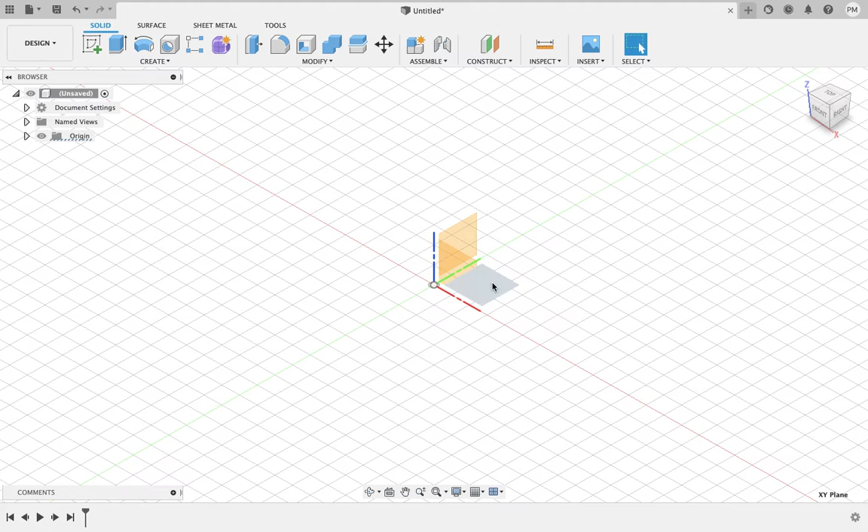So when you open up Fusion 360, make sure you click on the little origin box over here. We're going to sketch on this plane. Now sometimes it should orientate itself into a top view, but it hasn't there.

So what I'll do is click on the top, and we'll just focus on drawing the flower that we did the last day. There are all of these different drawing tools up here. I'm going to create a fit point spline, not even worrying about dimensions right now.

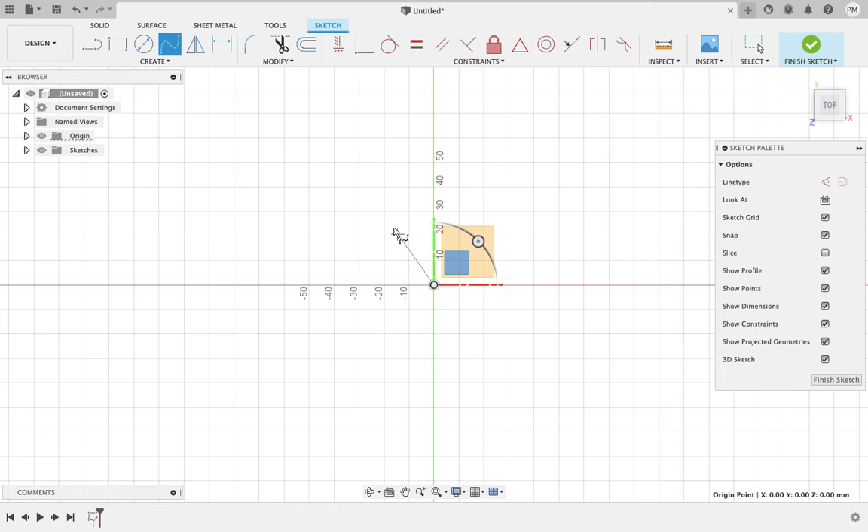So to create a curve, I click once, click twice, and I drag out the shape of a petal. Now what I could do is start manipulating that should I wish.

There are little toggle bars here, and you can move around different points. However, right now the main thing I need to do is flip this over and get symmetry on both sides. I don't know about you, but I like to work smarter, not harder.

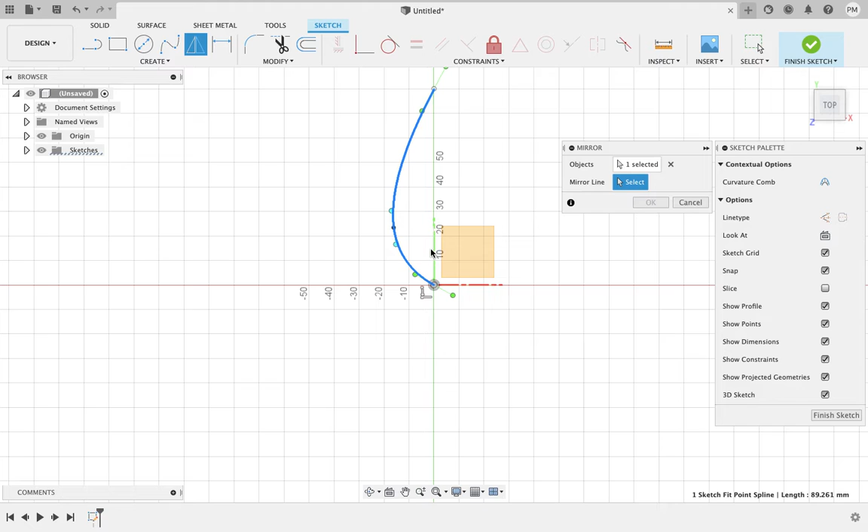In this case, what I want to do is mirror this object over the mirror line, just here. I'm going to flip it over, and now I have a flower petal.

So from here I can create a little pattern for myself. I go down to circular pattern, that's in the create menu. Circular pattern.

I'm going to click on this object, this object. To select two objects you can hold down shift. With Fusion I actually don't think you'll need to hold shift, it's an old habit. Center point is just here.

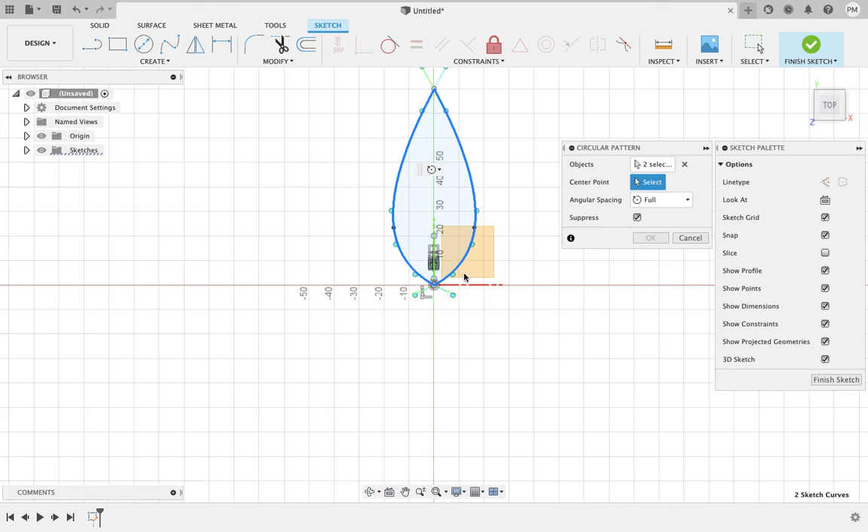And what I'm going to do is do as many flower petals as I like. Okay so that's like the Mitsubishi symbol there. Let's see, go 7. Cool, and now we have a flower.

So if I hit finish sketch and click on the home view, I now have something that I can extrude up into 3D. So let's see what's the easiest way. I'll try and do a selection box. That works pretty good, and if I extrude this, it has selected everything.

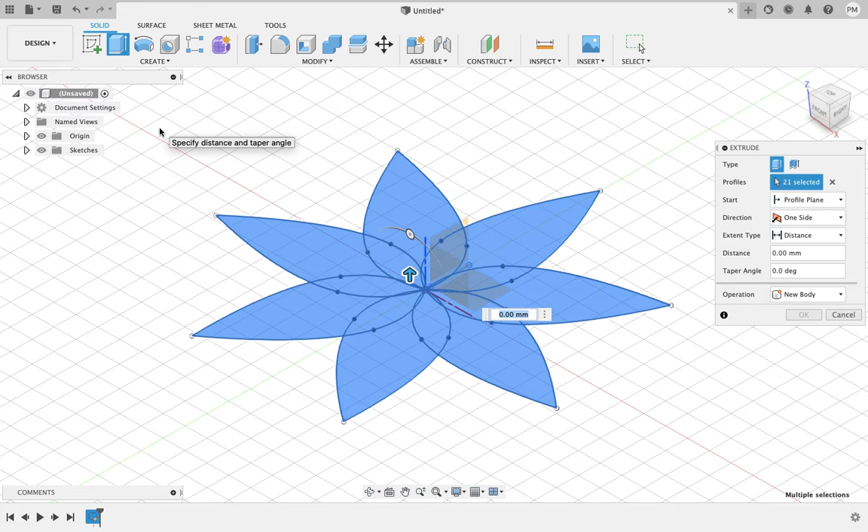So I can extrude this up maybe 5 millimeters. That's fine for now, and we're okay.

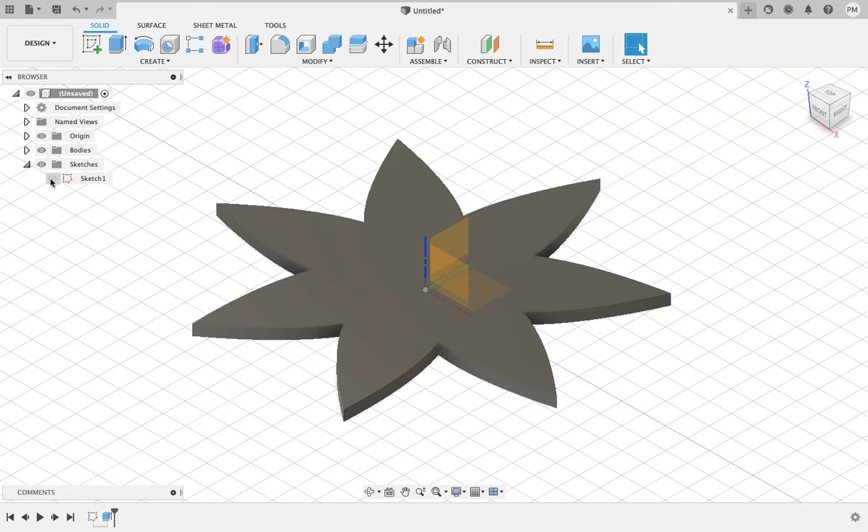Now what I'm actually going to do is go into my sketches and turn the sketch on again. So you can turn things on and off in Fusion just so you can see what's happening. And I'm going to turn off the body for a second.

So I've created a body from a sketch. I'm going to turn off the bodies, and I'm actually going to lift up the inside of the flower here to create 2 levels.

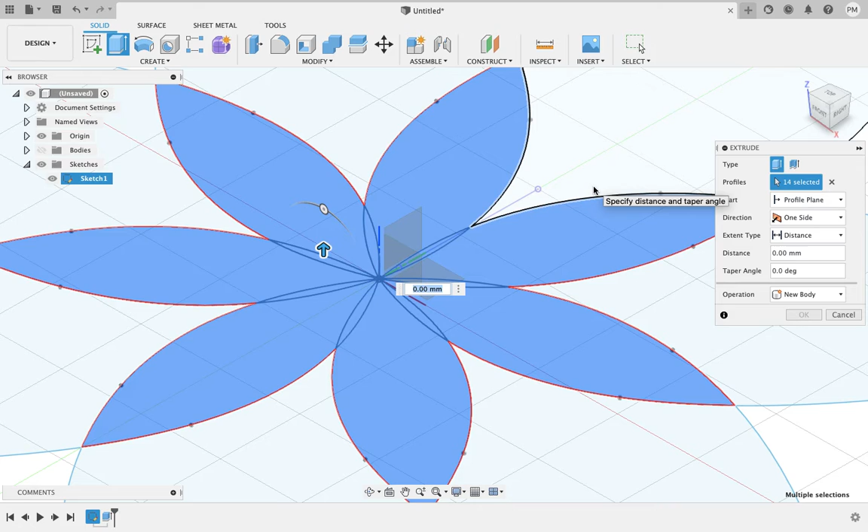Magic, so it's quite smart with the selection. Extrude. And this time I'm going to go up 10. Last time I went up 5 for the outside, this time I'm going to go up 10.

I have to turn on my old object. And Fusion right now thinks I want - see how it's gone red? I'll just zoom out so you can see what's happening. Fusion wants to cut this out, so you can just change this from a cut to a join.

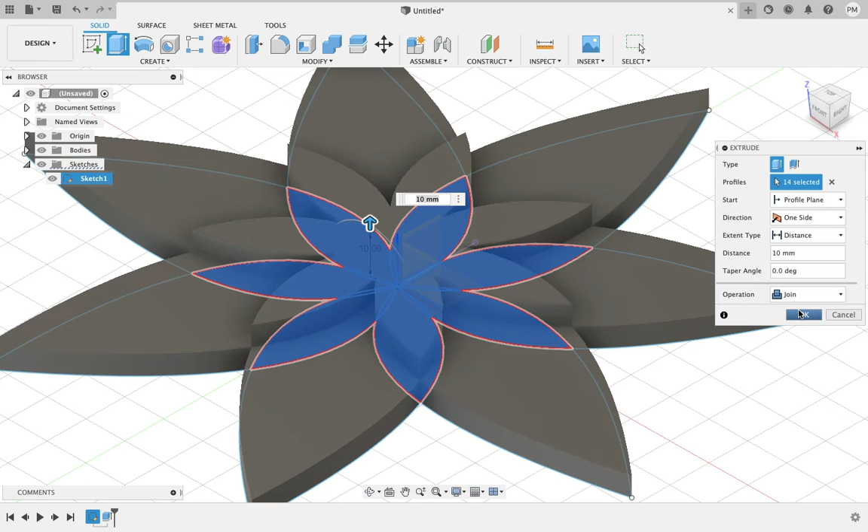And now it's going to create a solid object on the top, for example. See how it's hard to see what's going on with the sketch in the background? I can just toggle it off there, and now we have - let's go back.

Now we have a nice little flower that we can 3D print. To turn this into a key tag, for example...

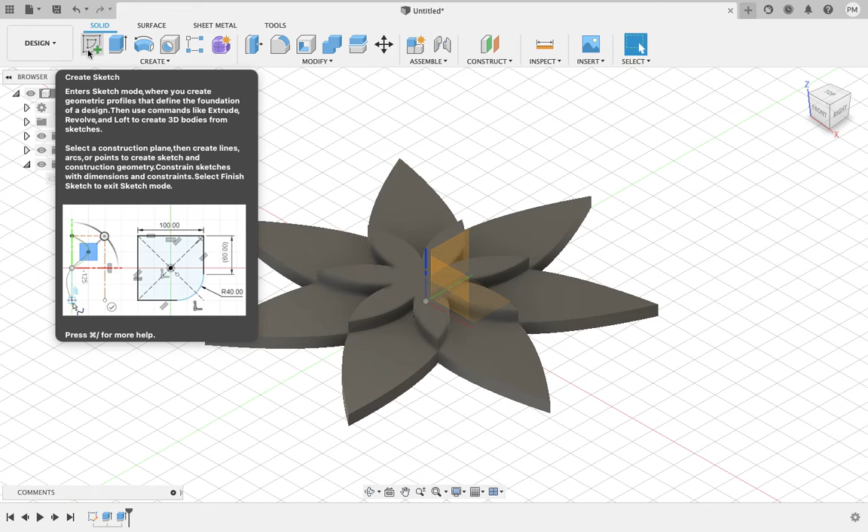What I can do here is create another sketch. Ooh, I can create another sketch, but it's actually more efficient to modify the old one, okay? You can create a new sketch, or you can go into your sketch over here, right click, and edit that sketch, which is perfect - it just goes back onto the same sketch and edits it.

We're just going to create a center diameter circle just on here, and we're just going to create a little hole for the key ring. That's a 6 millimeter hole there.

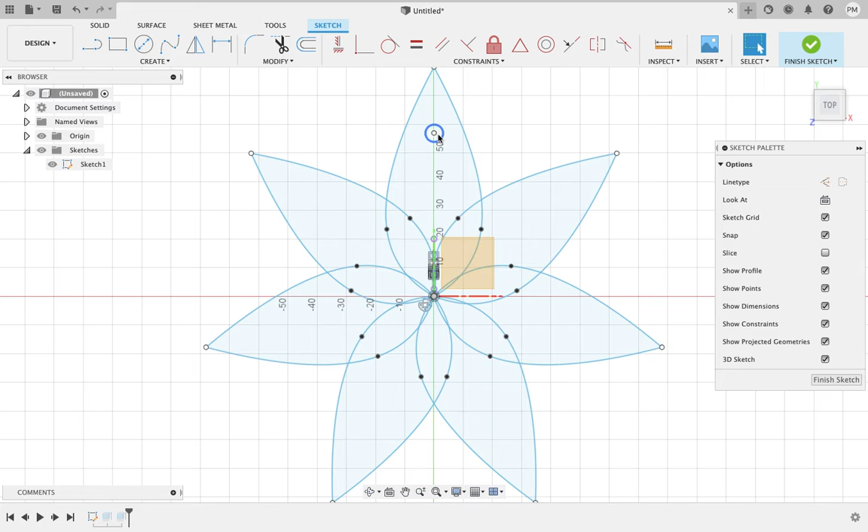So the last thing I need to do, if I zoom in, is extrude up this hole so it'll cut out of the body, and that'll make sense in a moment.

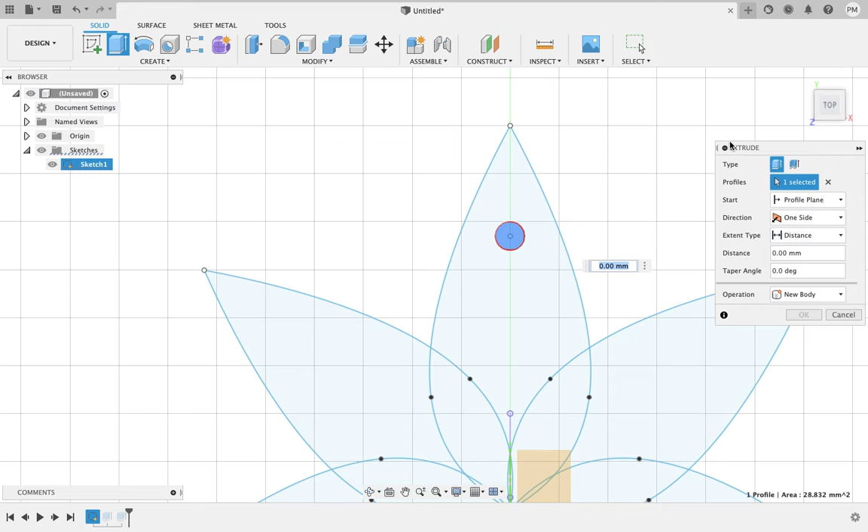A shortcut right now is if I hit E on my keyboard, it'll go out of the sketch environment, and I look at an angle, and what I'm going to do is extrude this up.

Now, I think what's happened here is, in hindsight, creating a new sketch would have been better because we had gone back in our history to the very start. It's created a little cylinder here. That's totally okay, we can work around it. We need to be adaptable.

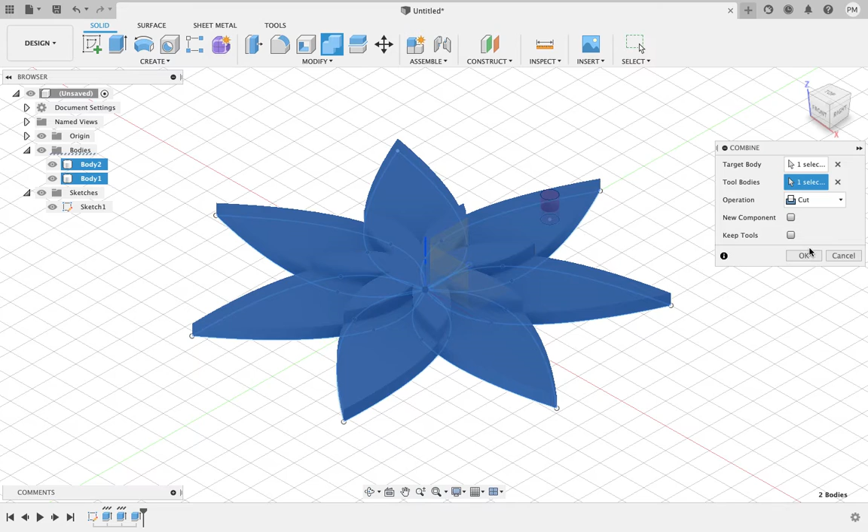So what I'm going to do is go to Modify, Combine, and use that little cylinder to cut a hole out of this object over here. Okay, now I've created my hole.

I'll turn off my sketch so we can see what's happening. If I hit A on the keyboard, that's the appearance dialog box. Once you go into the appearance, I usually just go straight to paint to get some bright colors, and we can think about the color profile of our logo and pulling in some colors here. So I'll go into paint, glossy.

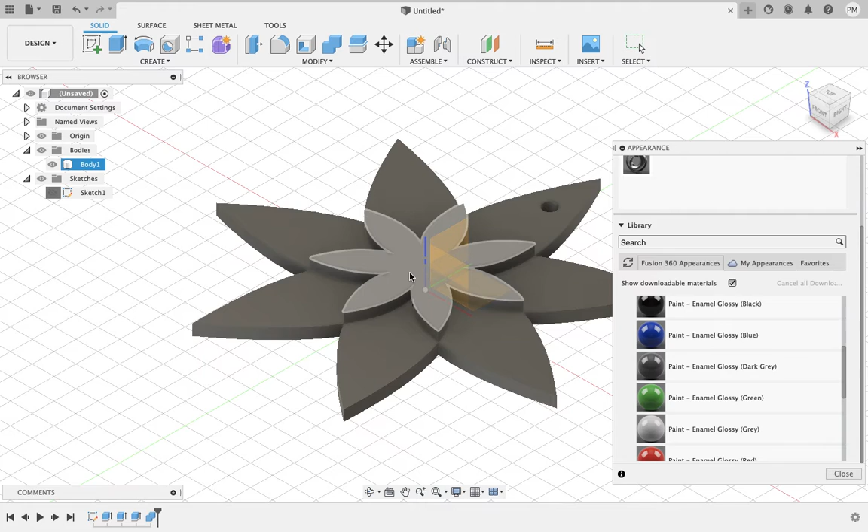What I'll do right now is click on a surface and drag the blue onto that surface there, and let's see. Now I could hold down shift and select all of these all the way around here, but that's a bit boring and I don't want to do that, so I'll hit escape.

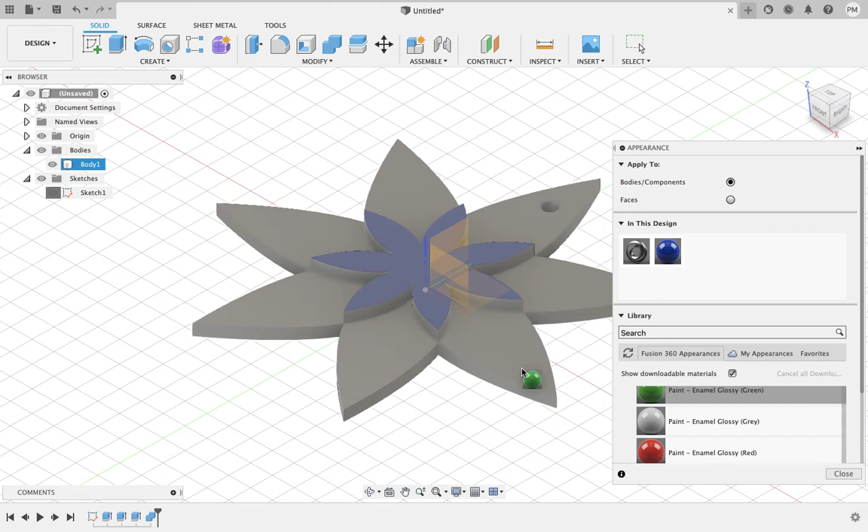What I'll do is with the appearance mode, I'll drag. What is glossy? Glossy is shiny. So what I've done is put green on everything, and then just on this top surface I'll put in a little bit of blue. So now we have something we could use as a key tag.

Now, for example, what we could do here as well, if we wanted to turn this into a candle holder — we're talking about making a candle holder — what I'd suggest is turning it into an interesting candle holder. Year 11s and 12s, do you mind if I focus on this candle holder? I know you're not making the same thing, but all the tools I'm showing you are relevant to your design as well, okay?

So what I'm going to do is show you another version of this, but rather than it being flat like something that's been laser cut, I'm going to turn it into more of an organic flower shape. So it's going to be curvier, okay?

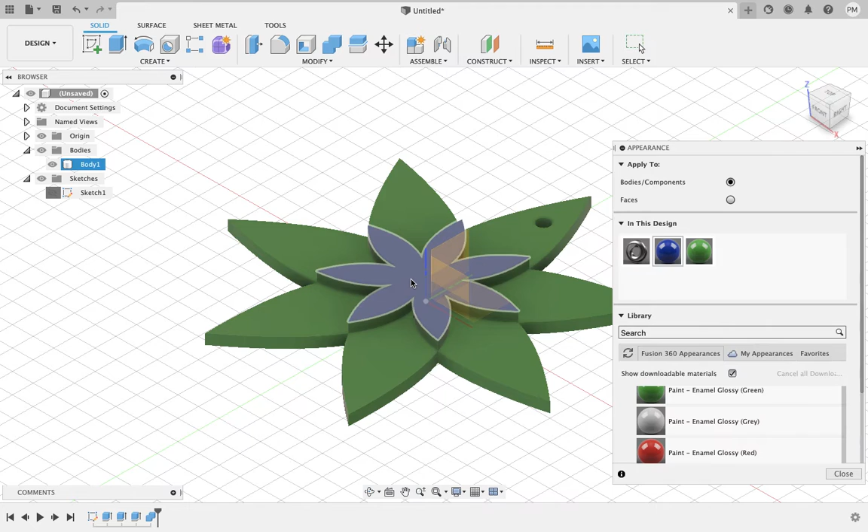Now, so next job. You can just leave it on the table, we'll grab it in a minute.

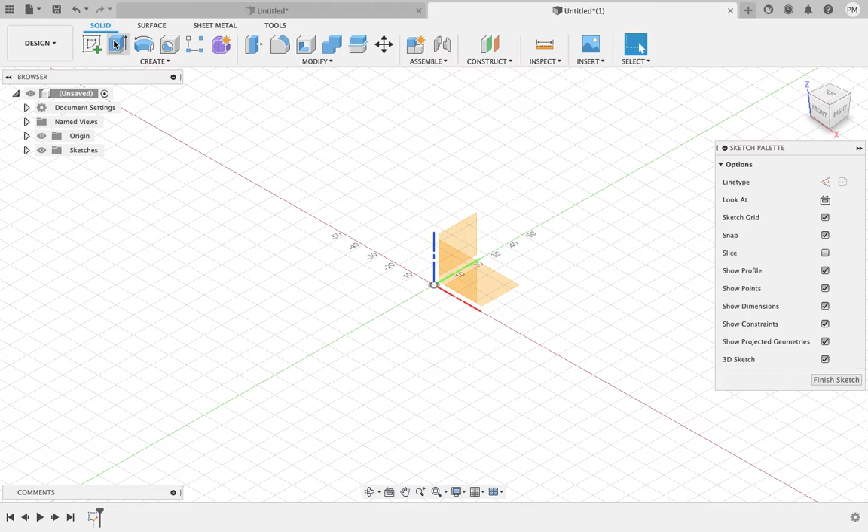Catch you later, Tina. Now, so we're doing a sketch on here in the top view, and let's see. There's a few different ways we can attack this, so I want to start strong.

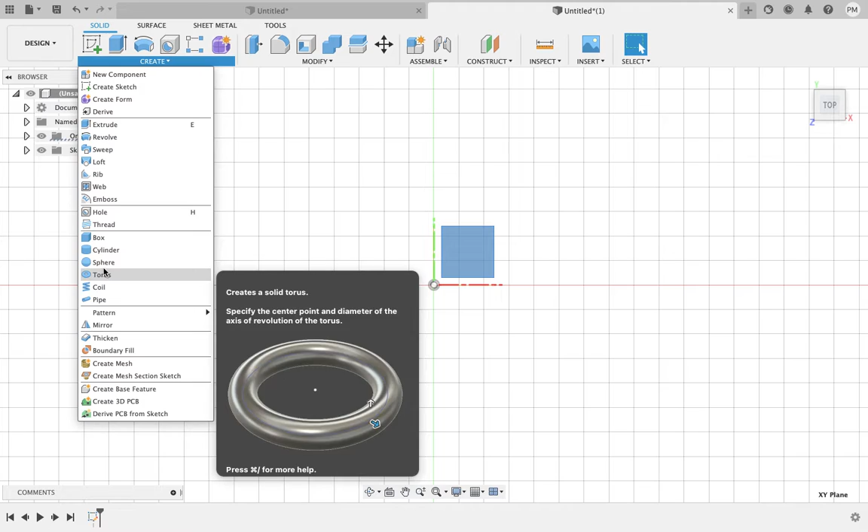Let's see, so I have a design in my head that I would like to create right now. Now this is getting a little bit complicated, but let's see how we go. So I'm going to create a little orb here. I'm in the form modeling section.

Okay, and I'm going to start modifying this orb. Let's see if I've bitten off more than we can chew in 10 minutes. So what I'm trying to do is create a petal shape, and then I can create a circular pattern from this shape.

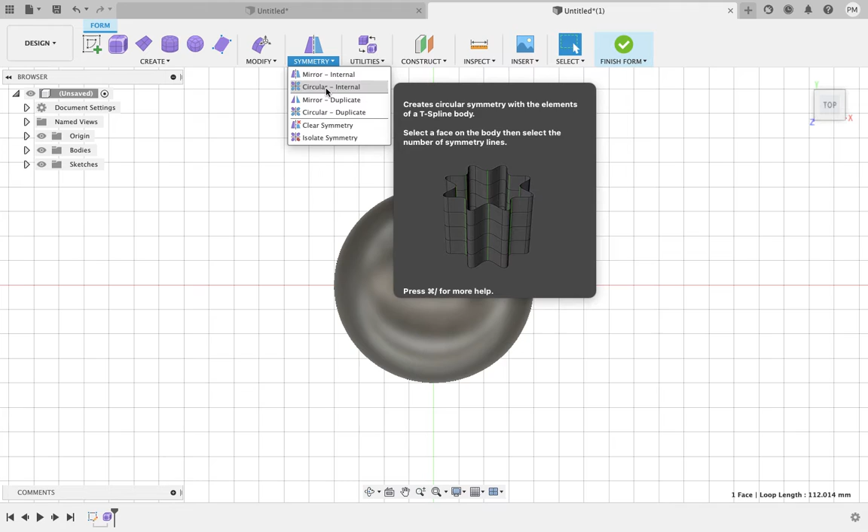What I just did there is create a line of symmetry down the middle here, and what that allows me to do is whatever I manipulate on one side, it will manipulate on the other side. Now I find this pretty cool part of Fusion, so let's see what you think of it.

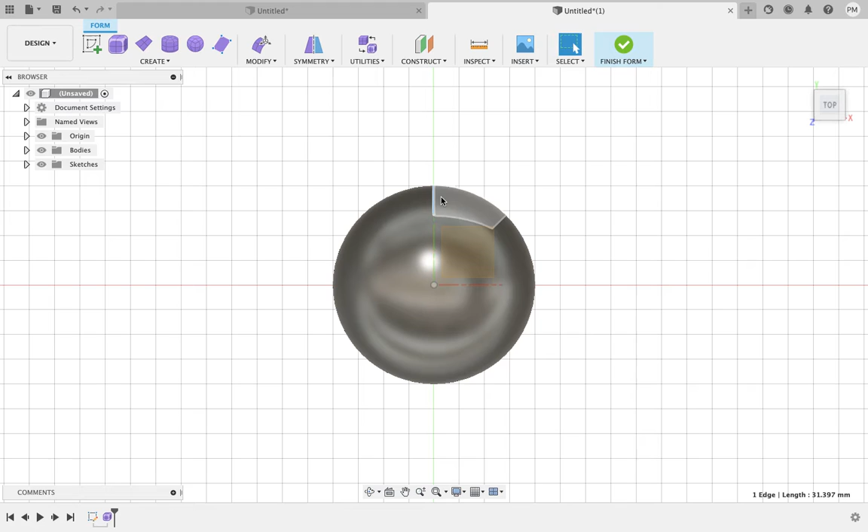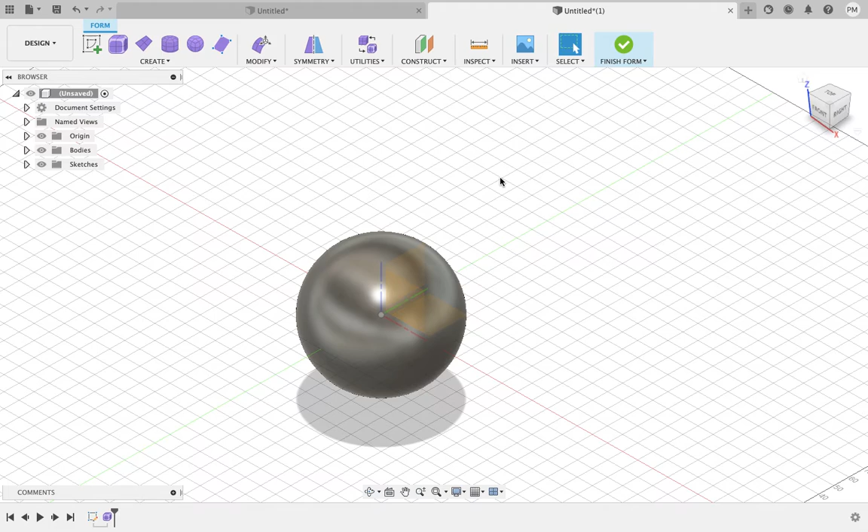I am going to right click and edit form, and now I'm going to start manipulating my shape. Look around at different angles, see what's happening. Okay, this will take a little bit of tweaking here.

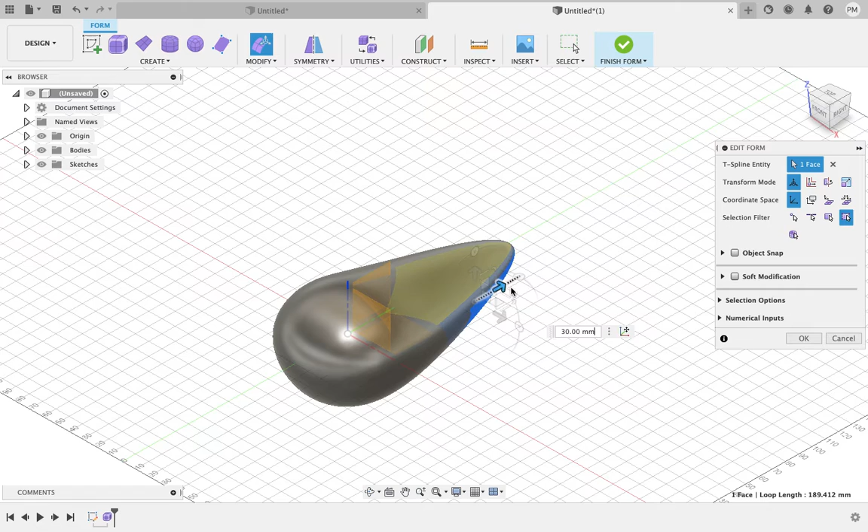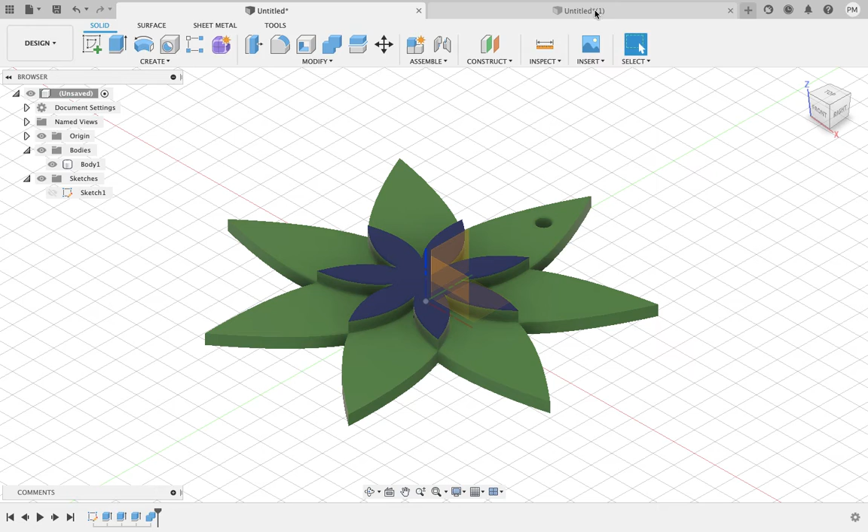Okay, I'm going to call that my petal for now. You can see it's more of a 3D shape rather than the flat shape we have back here. So at this stage, what I'm going to try and do is hopefully create a circular pattern from this form I've just created. Let's see — create pattern, circular pattern.

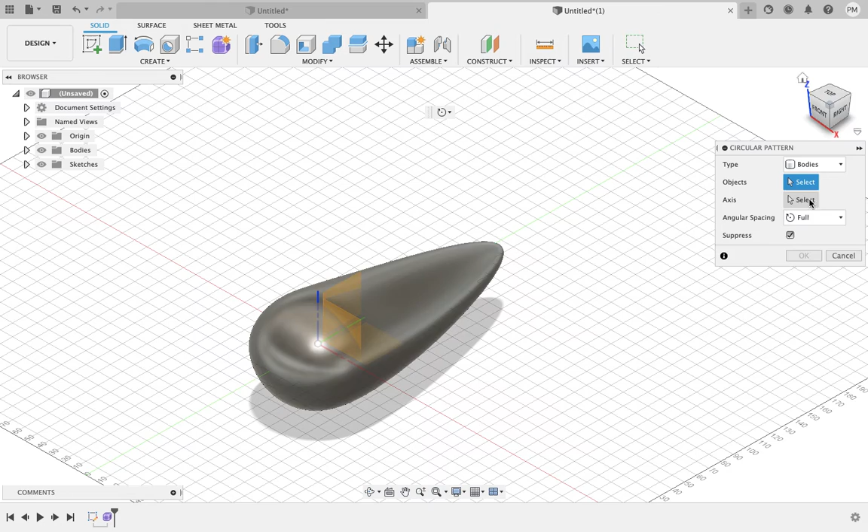So the axis I'm choosing here, it's hard to see, but I'm choosing the Z axis to rotate around this point. It's looking a little bit strange there, so let's see how we go.

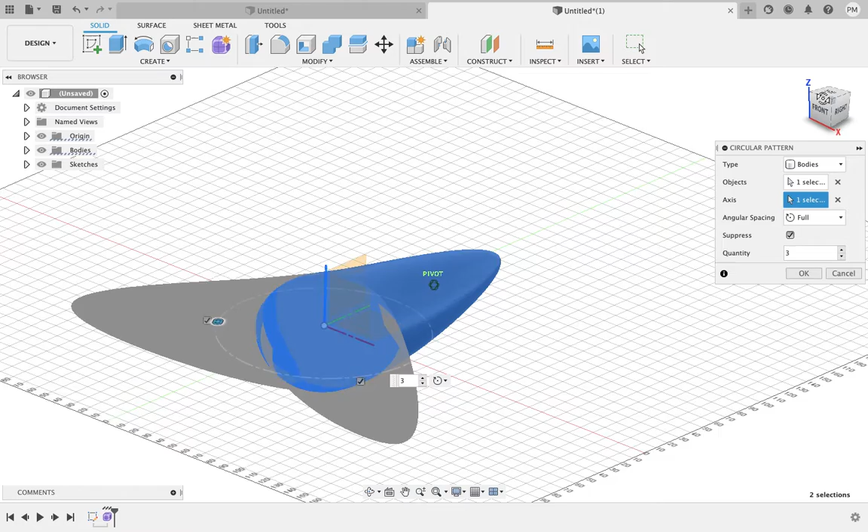Okay, so what I have here is a bit like a flower, or a bit of a starfish, but this is something we're going to turn into a candle holder. Now, obviously, this is not going to sit well on a table because it's round on the bottom.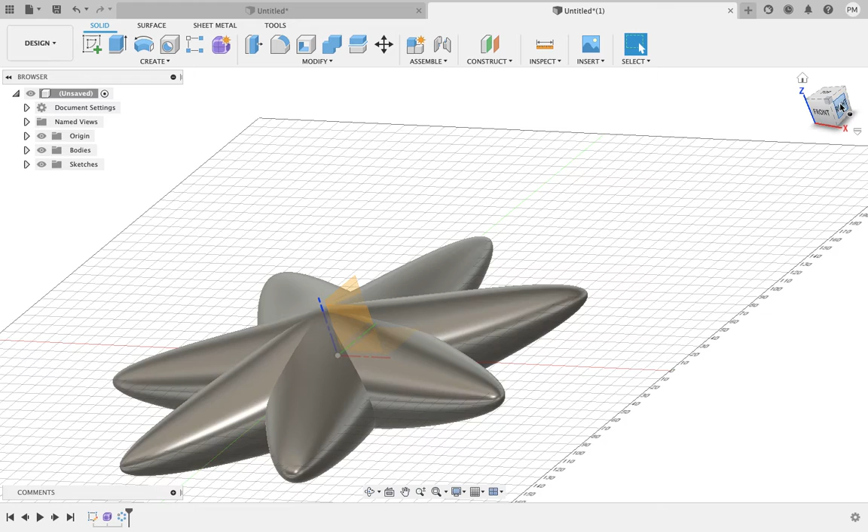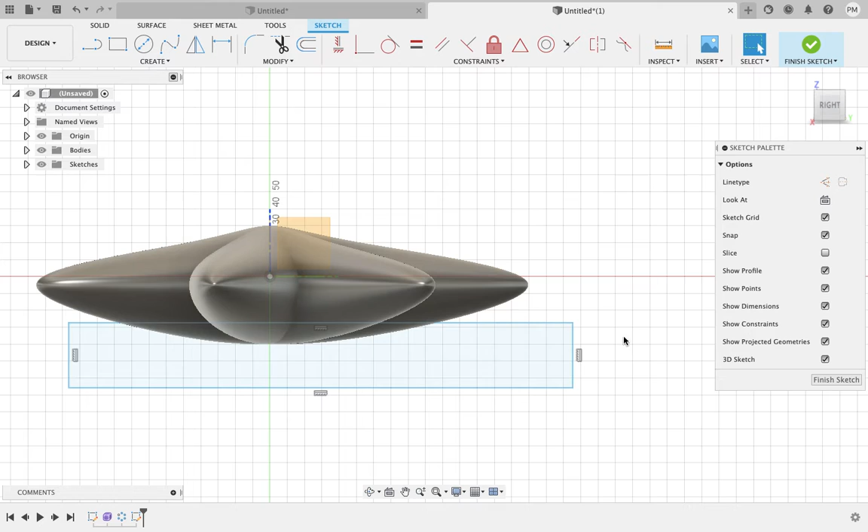But what I can do here really quickly is create a sketch on this plane. I'm going to draw a rectangle down here and chop off the bottom of this so it'll sit flat. So I've drawn a little sketch and hit return. When I click on here, if I hit E on the keyboard, it extrudes.

So I hit extrude, now looking from an angle to see what's happening. And I'm actually going to extrude on two sides. This is very satisfying here, it's just going to chop off.

Rather than selecting two sides, if you go symmetric, it's better. It just saves you dragging out both sides in this case. So that's going to perform a cut.

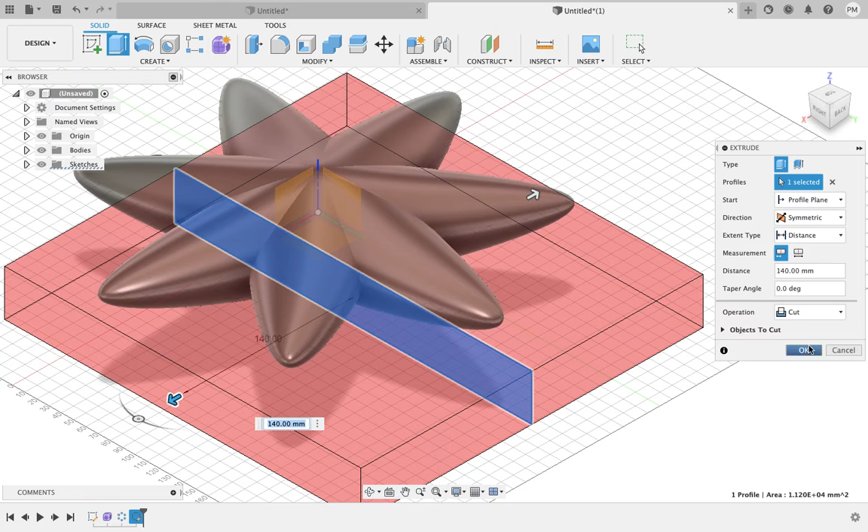And now I have something that's close to a candle holder, but we need to put our tea candle in the middle. Now, at this stage, what we want to do is find out the size of the tea candle for the candle holder we're doing.

I think it may be 50 mil, I'm going to take a punt on 50 mil right now. So what I want to do, and I'm showing you a few advanced tips here guys...

Let's see, I need to create a sketch above my object, okay, up in the sky. So what I'm going to do is turn off my object. Come in, hi there.

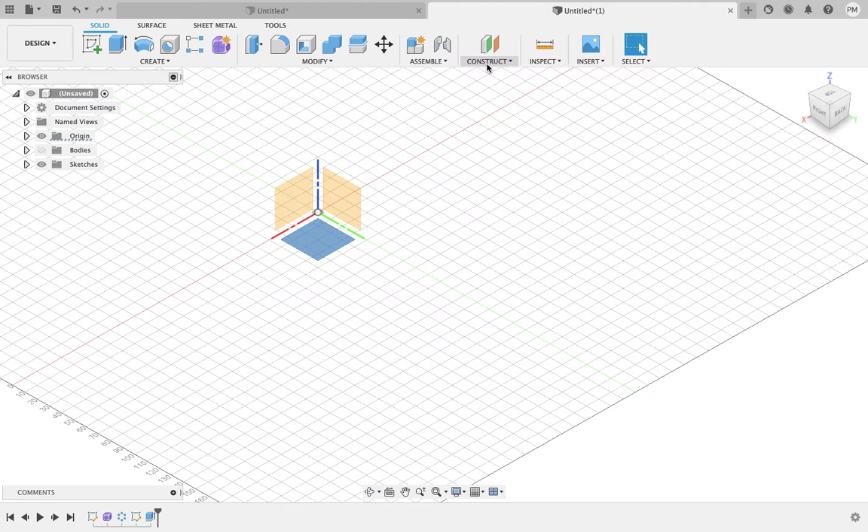Okay, yeah sure, there's one here, all good. So we're going to construct an offset plane. Basically this is just like a piece of paper that's going to hover up above the top of our body, which allows me to sketch a little bit more easily.

Now let's have a look, home view. I'm going to sketch on this new plane that I've just created. So create a sketch, sketch here, look down from the top. And don't worry if you're finding this a little bit confusing, I've gone a little bit advanced on this, so my apologies if you're struggling with it a little bit.

50. Now we can see here that we've designed a shape without thinking about the overall size that we want. We can scale it down in a moment. But if this is going to be our tea candle, 50 millimeters... could be 40 mil, I'm not sure, we'll see.

Quick Google would answer. 38, nice. I remember we used to use a 38 millimeter drill bit in woodwork to drill out the right size hole. Brilliant, 38, nice. Okay, so that's the size of our tea candle.

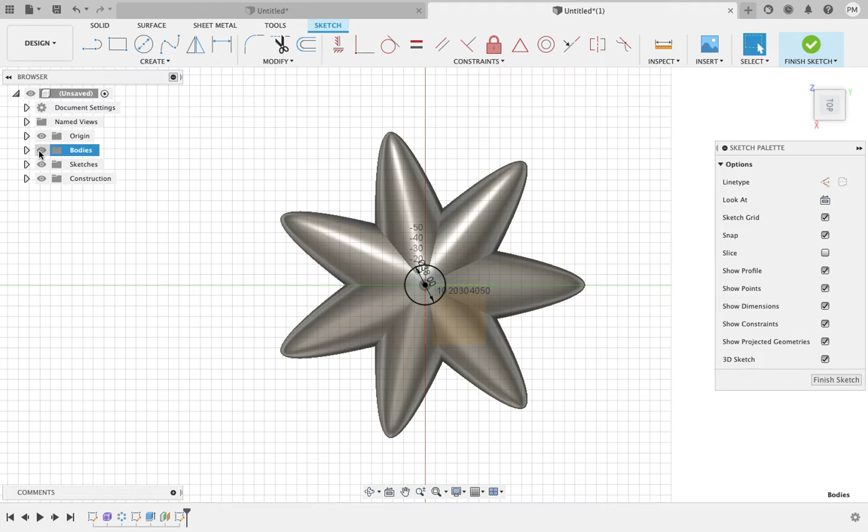So you can see my body is way too big, and that's okay because we can scale it down now. Click on my body, I'm going to finish that sketch, I'll go back to it later.

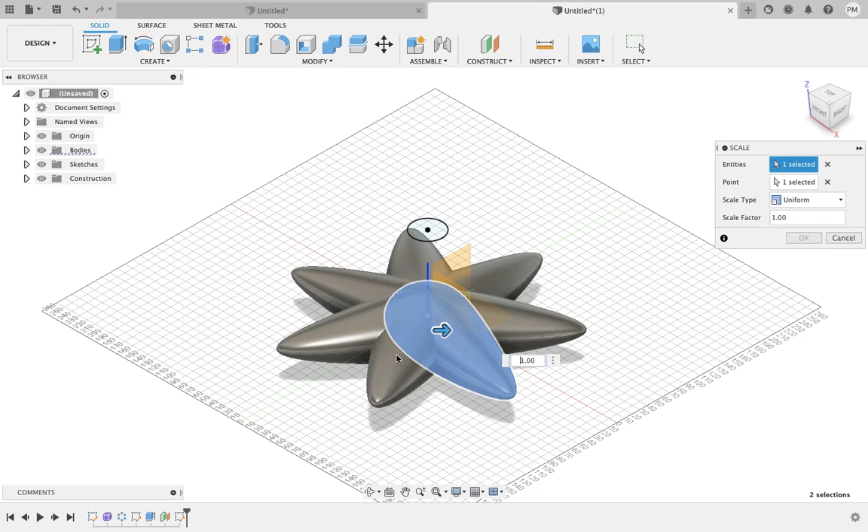On my body, I'm going to modify, I'm going to scale that body. Unfortunately scaling in Fusion, I don't really like it too much to be honest. It doesn't allow you to scale something to an exact size, but...

We'll live with it, so I can use a scale factor. If I wanted half size I'd go 0.5, I'll go down to about 0.7. That looks decent to me. Cool, and now the last step, because we're tight on time, I'm just going to zoom in on here.

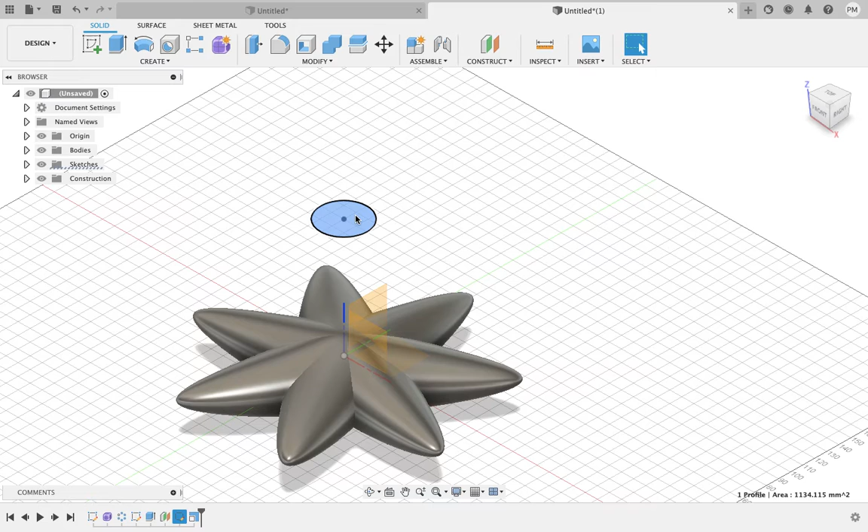I'm going to use this little disc that I've drawn to create my cut. So I'll hit E on the keyboard for extrude, drag this down, and Fusion has figured out, okay, we think you want to cut this hole out. If we're wrong you can change the option down here and turn it into a join, but we don't want that, we want it to be a cut.

And what is the height, Ashley? I reckon it's probably 12 mil. 15, very accurate here.

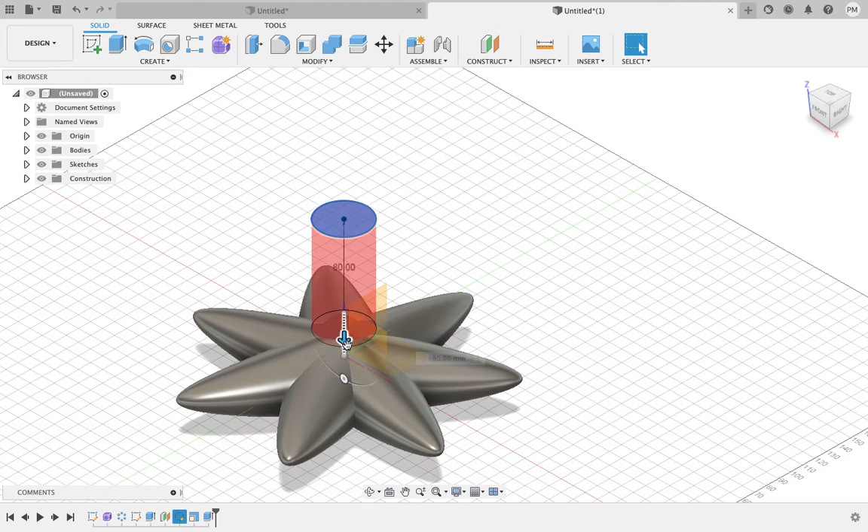Do you know what I'm going to do, Ashley? I'm just going to go down 10 mil because it can be sticking out. So we just need enough so that the candle is sitting in there and won't fall out. So I've gone down 10 millimeters, and let's see how we're looking.

And there we go, you can see the whole... oh, I didn't go down 10. So check that out, I've made a mistake there. But the good thing is in Fusion, you've got a little history down the bottom, a little timeline, so you can right click down there and edit feature, and I can just drag it down a bit further. Magic.

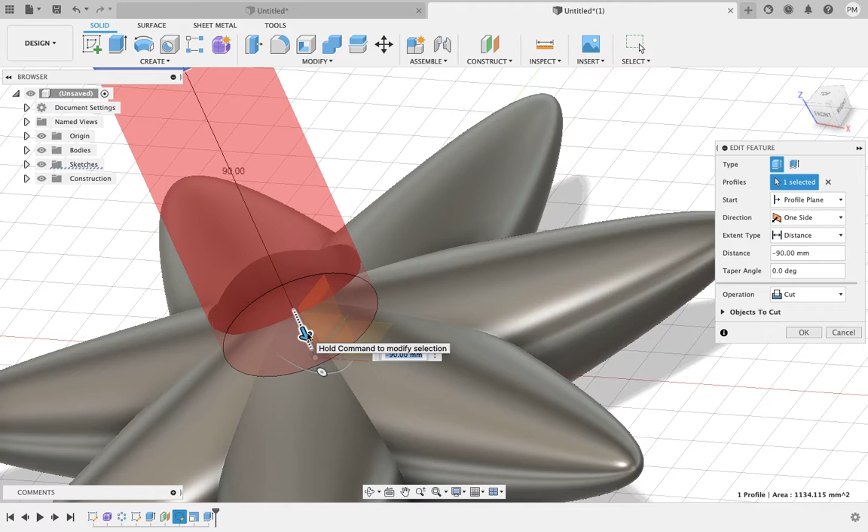Okay, and now we have a Breed tea candle holder promotional item.